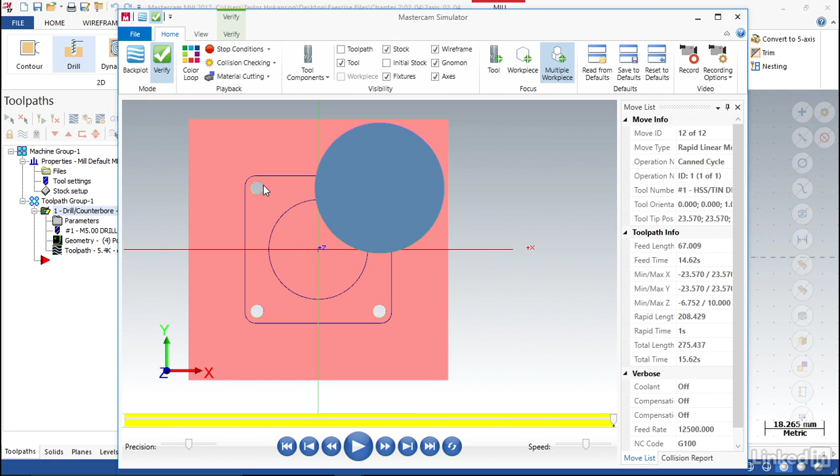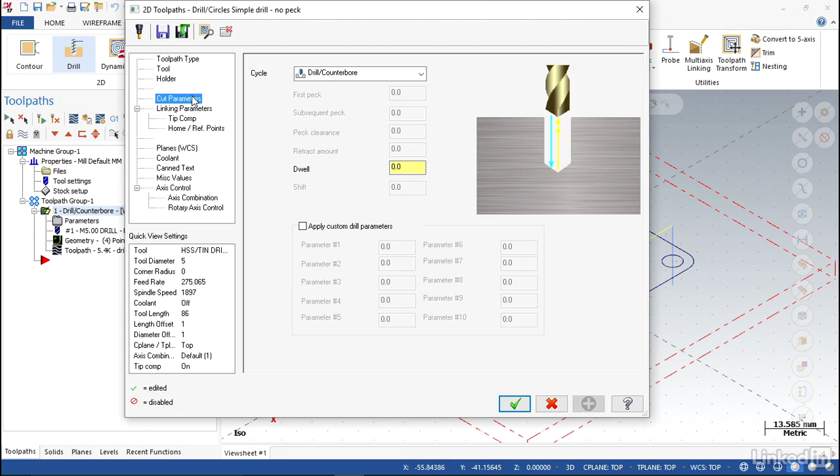Now let's say that you did a simulation and that you noticed there was something that you wanted to change. To do that, I'll switch back to the isometric view, and you can see roughly how far, thanks to the backplot, these drill passes penetrate into the material. So say, for example, I double-click here on parameters, and then I switch to linking parameters. Here I've established the retraction, for example.

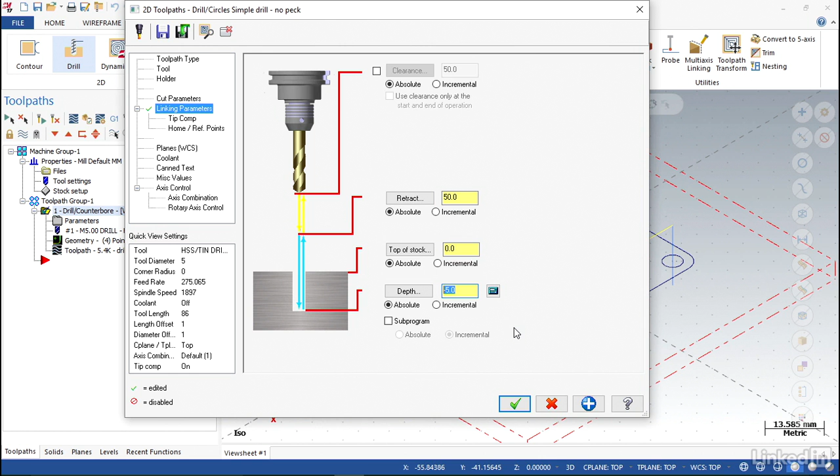So let's say I know that I'm using a clamp that's really tall, and that I might need my retraction to be something on the order of 50mm instead of 10. It could also be that I only wanted to drill part way into the material, so I might just say -1. Now if I hit the check mark, the backplot will regenerate, but it won't finish regenerating visually until I regenerate the toolpath down here at the bottom. You can see it has a red X. So I'll click there and hit the check mark.

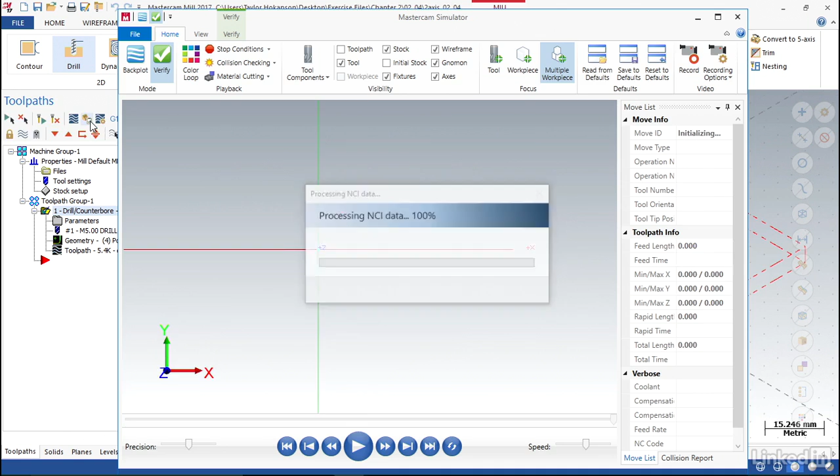And that backplot regenerates. We saw it for a moment there. So now you can see my retraction is much higher, but my penetration is slightly smaller. We can verify this again. And you'll see that tool lifts way up as it's making its travel across the workpiece and also fails to penetrate as far into the material.

So the flexibility of the simulation is that we can move back and forth between the parameters of the machining operation and a visualization of what it will do on the machine table until we get that job looking absolutely perfect.